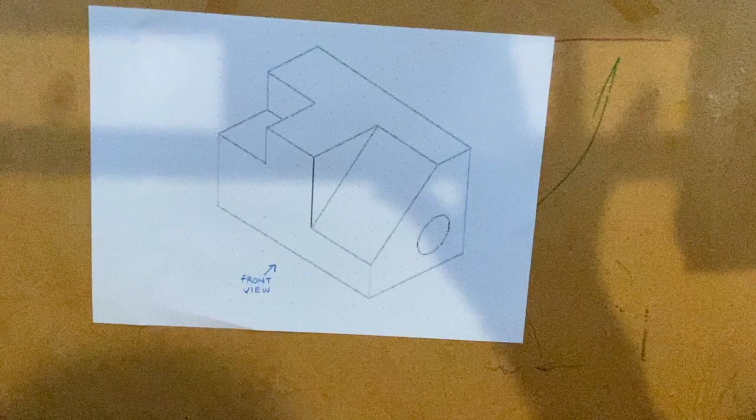In this demonstration, I'm going to show you how to draw this isometric object as an orthographic drawing. I'm going to draw it at the scale of 1 to 2, so it will be half the size of the object that's been printed out here.

Always start an orthographic drawing with a line across the base of the page. It leaves enough room for dimensioning. And a vertical line to make an L shape on the page.

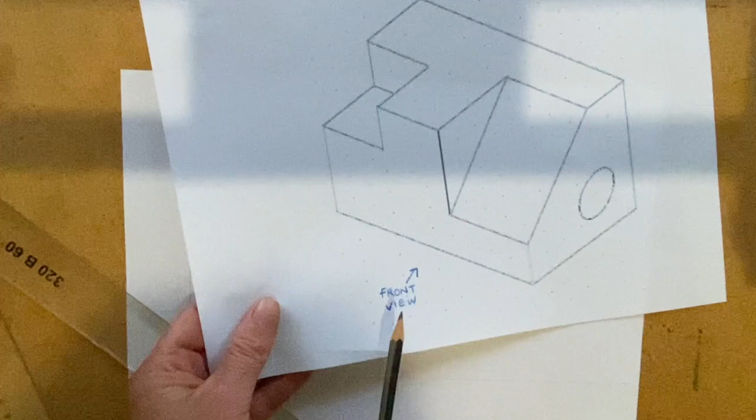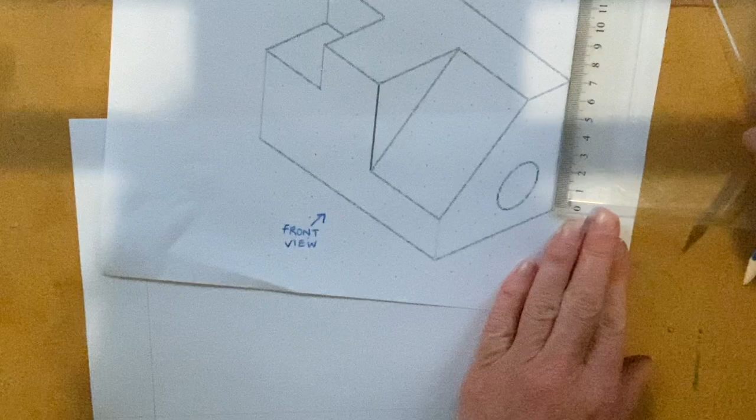Now, I've been given the front view, so in an exam situation, just double check that you haven't been given a front view already. And I'm going to draw this as a crate to start with. So that's 120 mil, so I'm going to go 60 mil across. And it is 70 mil high, so 35 mil high, so 60 by 35 at half scale. Using the edge of the page.

Okay, I'm going to start by drawing in these different areas. 35, so half of 35, that's testing my maths. 17.5 mil, going down 20 mil, we go down 10, that direction. I'm just going to make it 30 mil. And it's another 30 across there.

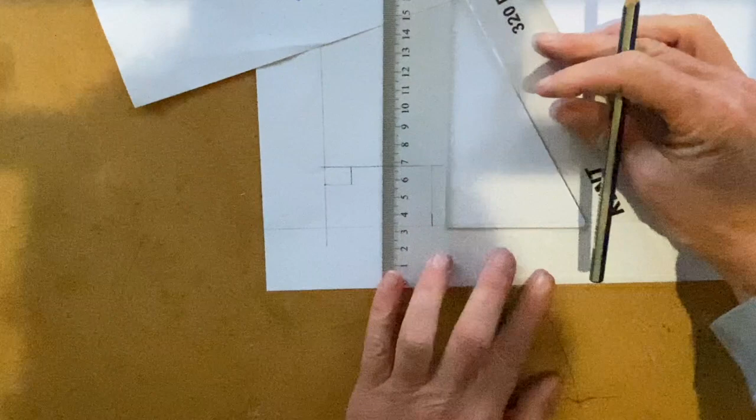I'm going to draw in as 15. We're going down 50 mil, so 25. And we finish it across the bottom there.

Okay, now this is angled, so when I look straight at that, it just appears as a flat rectangle, which is what I've indicated there. I do need to go back once I've drawn this view, and I need to put the hidden detail of this. If this is a hollow cylinder, I need to put that in there, indicate that there. But that is my front view.

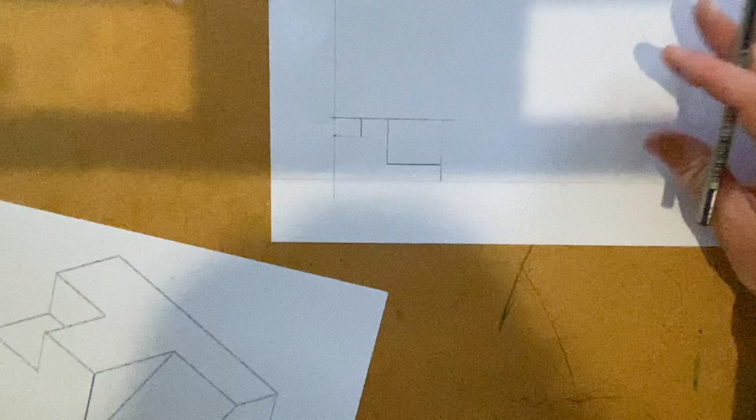What I can do from this point, actually, this is a really good technique to use. It's the 45-degree line technique. So use your 45-degree set square, and from the top right hand corner of your object, draw in a 45-degree line. And that way, once we do our front view, our right hand view, I can rule the lines up and across, and they will give me my details.

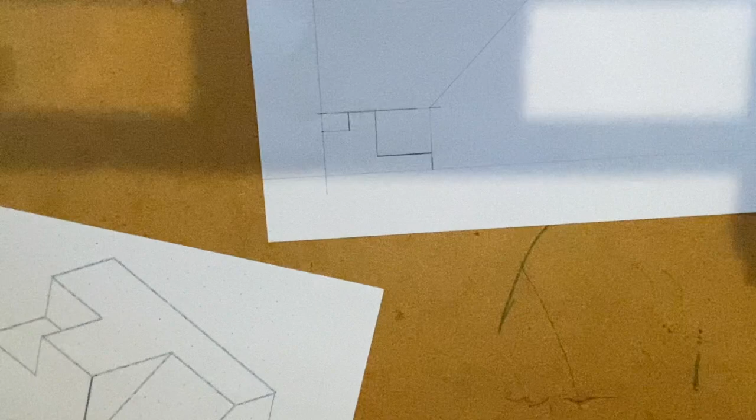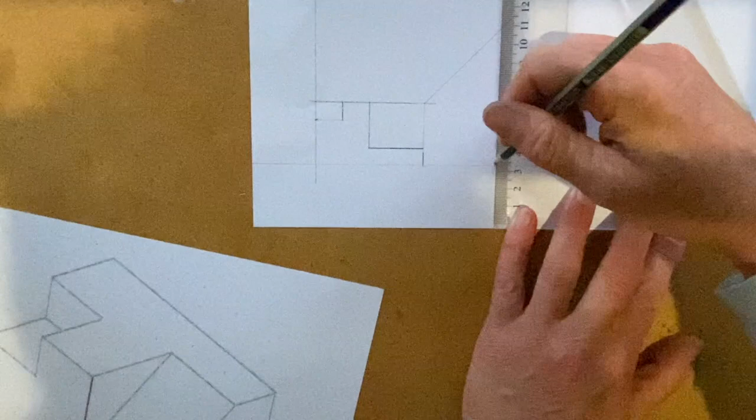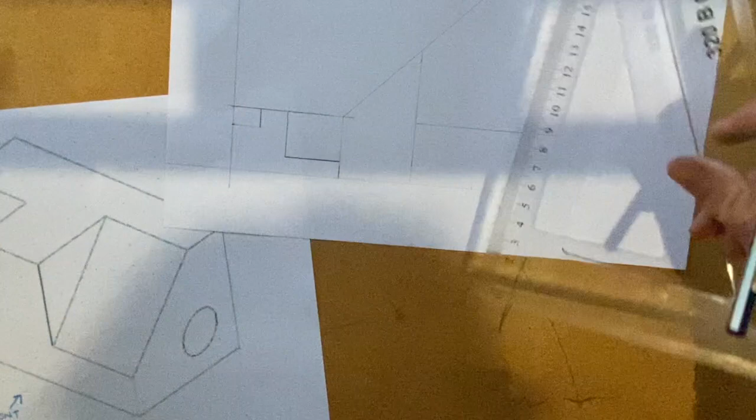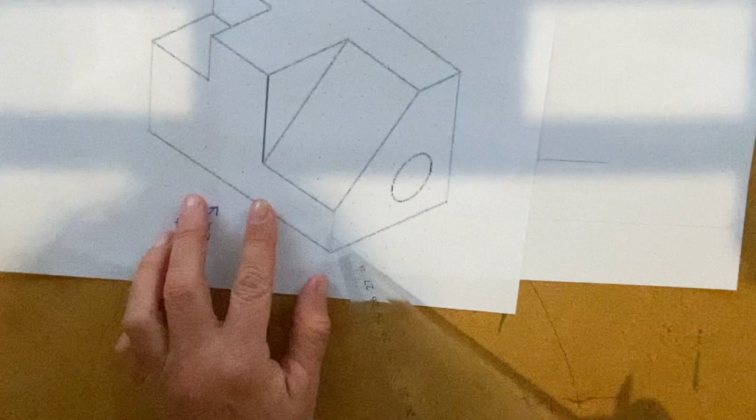Now I'm going to put 40 mil between views because I have enough space on this page. You can either use 20 mil or 40 mil, but whatever you do here must be done there. I already know the height, so I can just run that line straight across. It's 70, so I'm going to go 35. I'm actually just going to run that line straight up there already. Now, this angled line here, I know that that is 20 mil and that is 20 mil, so it's going to go up 1 centimeter and 1 centimeter.

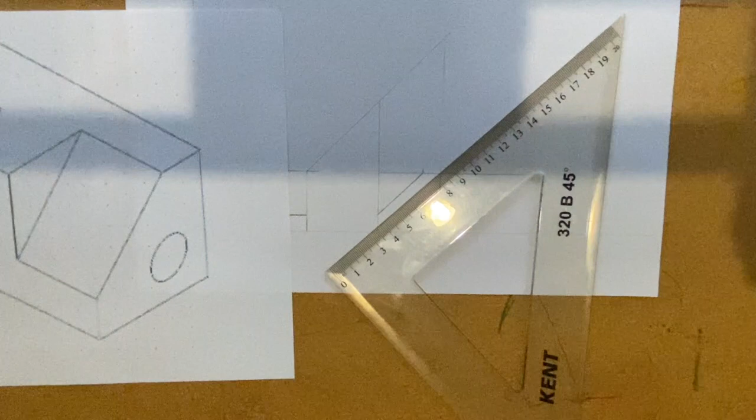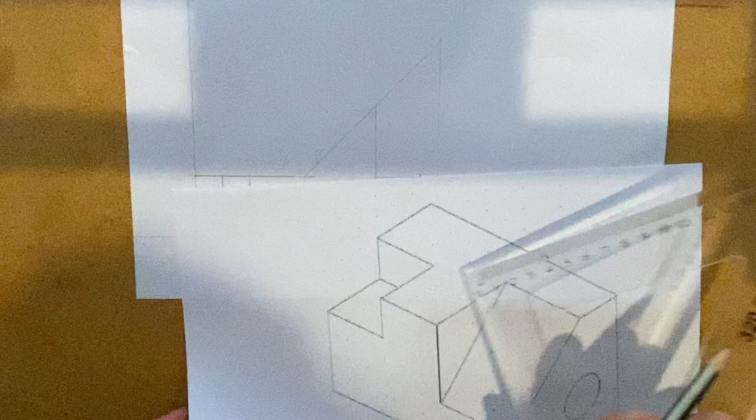Now I will have to show the hidden detail of this, which is pretty easy to do because I've got that information there. I know it goes from the top, from the right hand view, it goes back 30 mil that way, so 15 mil. And I'm going to change that to a dotted line because it is hidden detail. Okay.

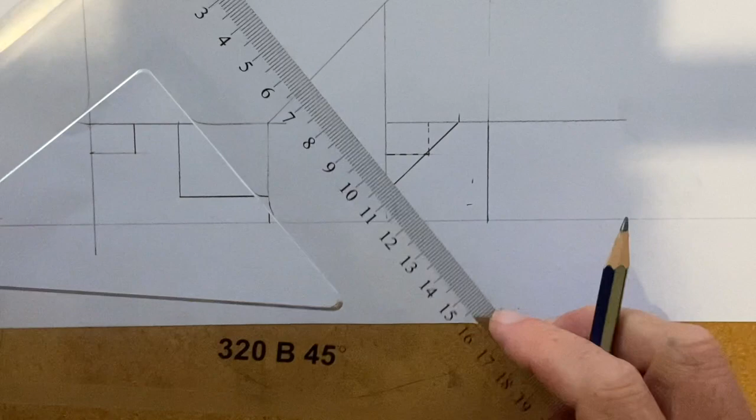So now I do need to put in, zoom in for you so you can see that. This circle, it's 1 centimeter up, 1 centimeter across. It's 20 mil in diameter, so I'm going to go half, and make it a 10 mil circle. So 5 mil here, 5 mil here. I'm going to draw this in as a box to start with. Then I'm going to find my circle template. 10 mil high. My circle template. I have my 1 centimeter circle.

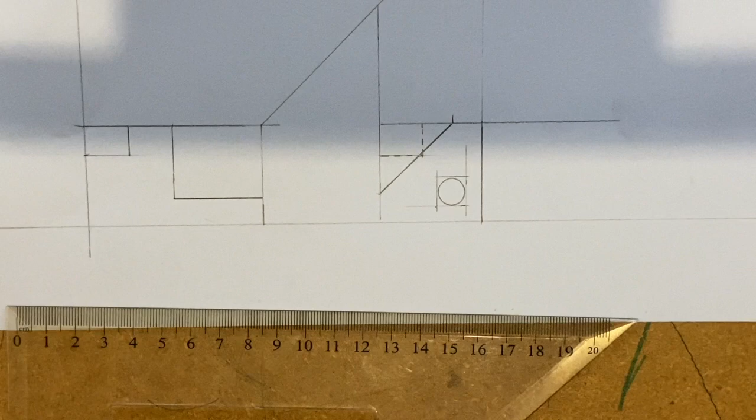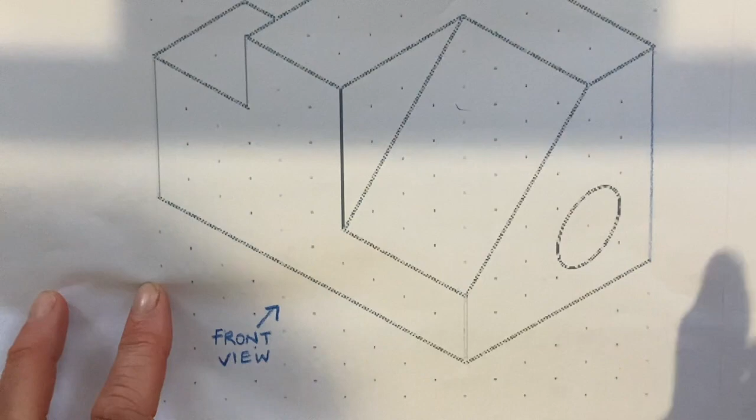And I'm going to draw straight lines across the page from the top and the bottom of that circle. I'm actually going to put them in all the way through the front view because I'm not quite sure, but I think this is a hollow cylinder that goes all the way through. So I'm going to indicate it as one anyway.

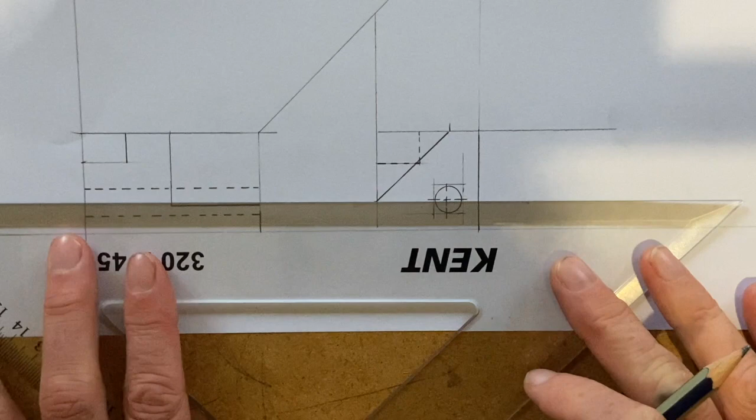With my little circle, we indicate that it's a cylinder with a long line, short line, long line, and then a long line, short line, long line. Should be a little X in the middle. And over here, the long line, short line, long line, and just extrudes out a little bit on either side.

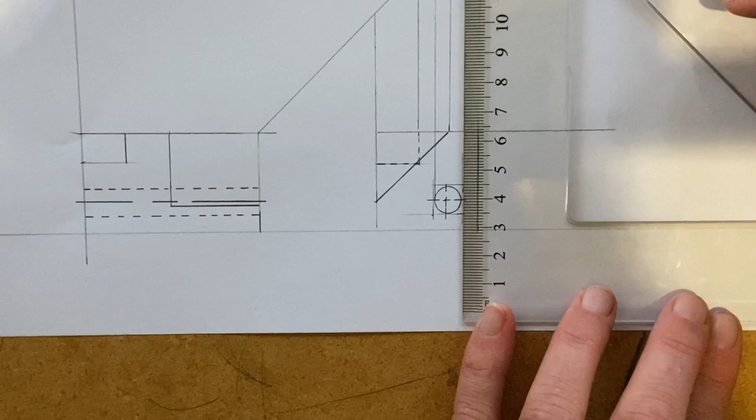Okay, so I can then rule up from all the main points up to my 45-degree line. That gives me most of the information that I need to do the top view, and I'll show you how we work that in a sec. And then what I can do, lining up my set square,

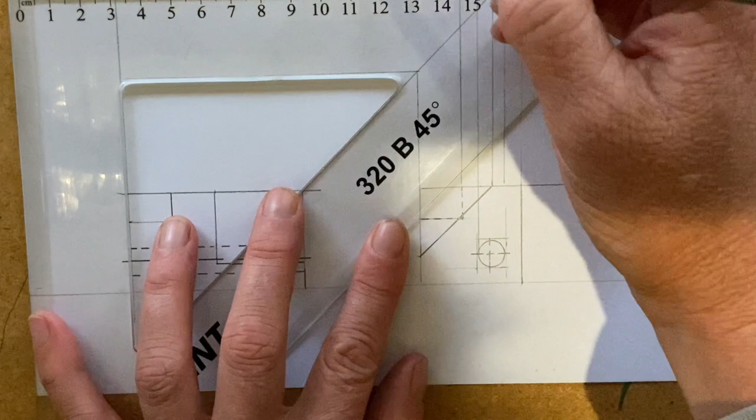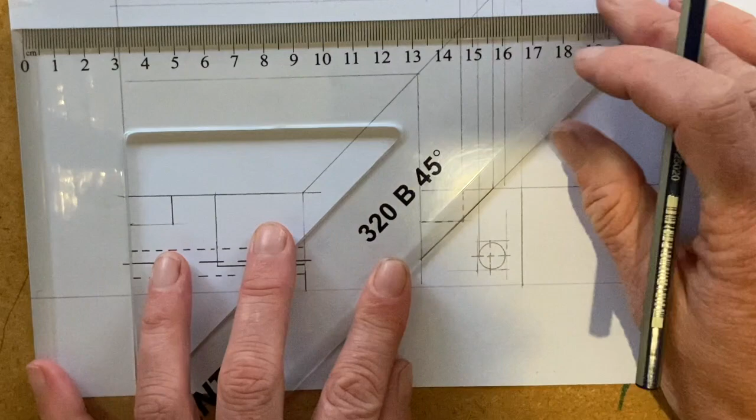you don't have to do it this way. It's just one way that orthogonal drawings are done. As long as you're really careful, you can just draw in your top view. Just make sure that everything is exactly as it should be. Then I can do my lines going up this way.

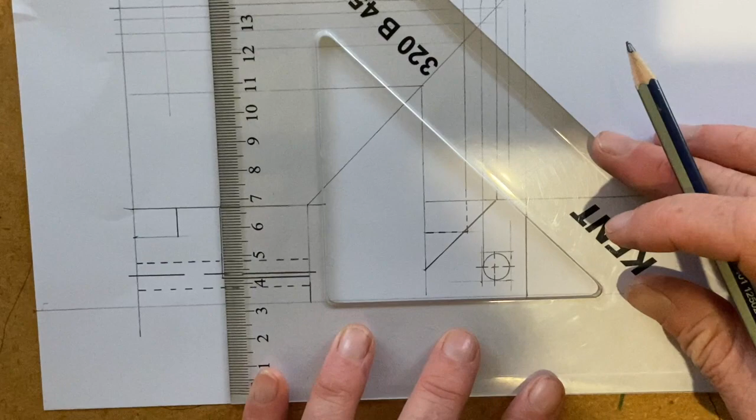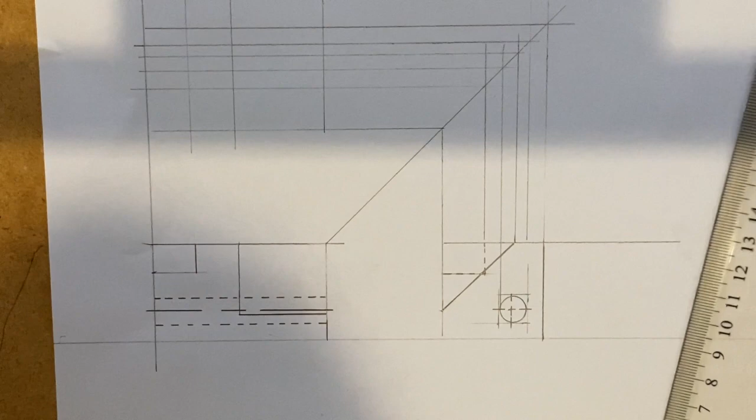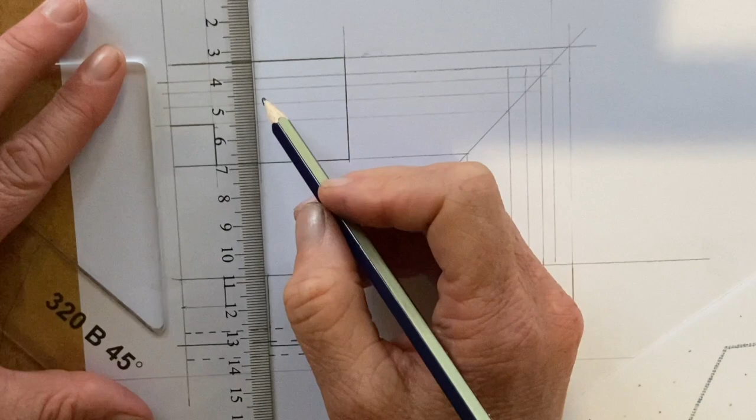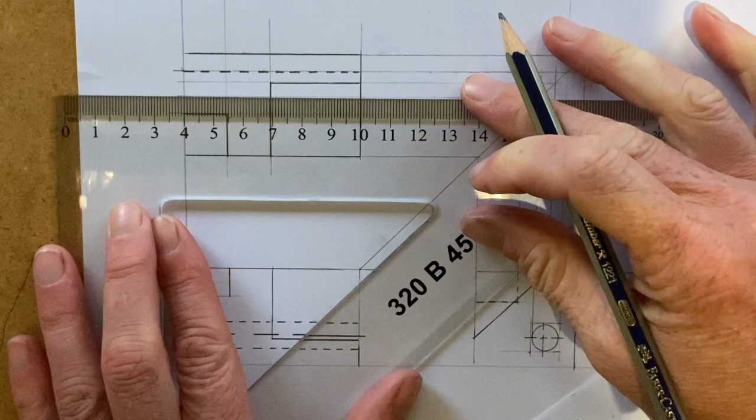If I have a look at this, I've got to imagine I'm looking down on it and I'll be able to see this shape, which, I might just darken up the edge lines first. Again, that hollow cylinder is indicated with dashed lines from the top as well. Long line, short line, long line.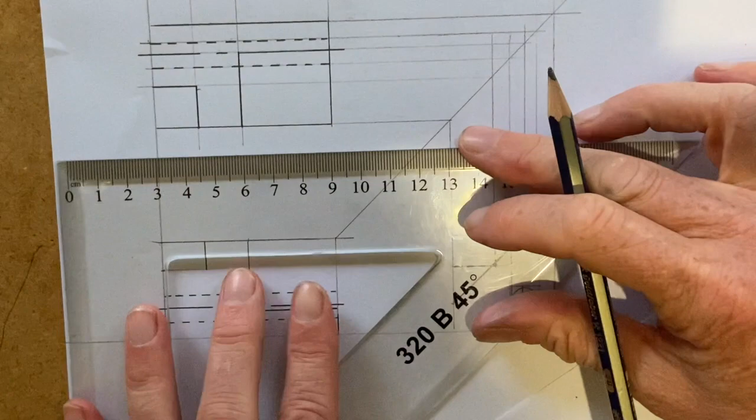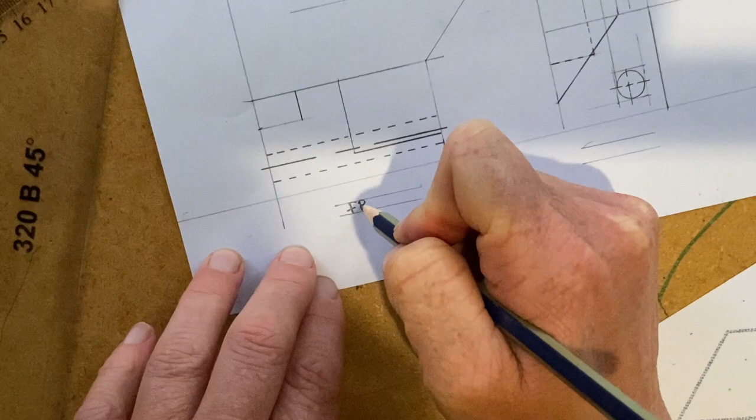Okay, so that's my 3 views. And to label my views, I just need capital letters. Always remember to put in a third angle projection symbol. So with your third angle projection symbol, it's one circle inside of another.

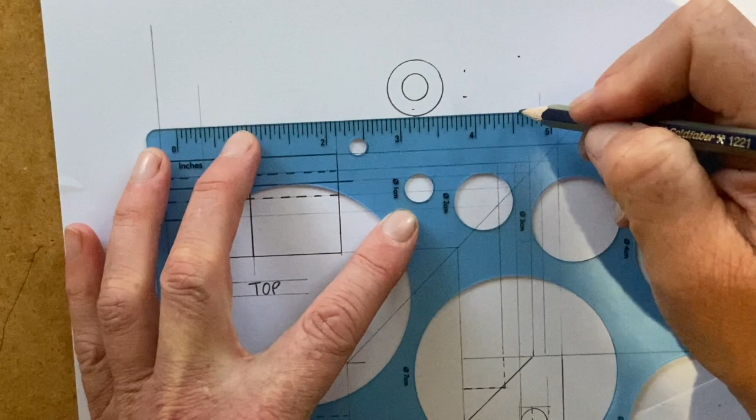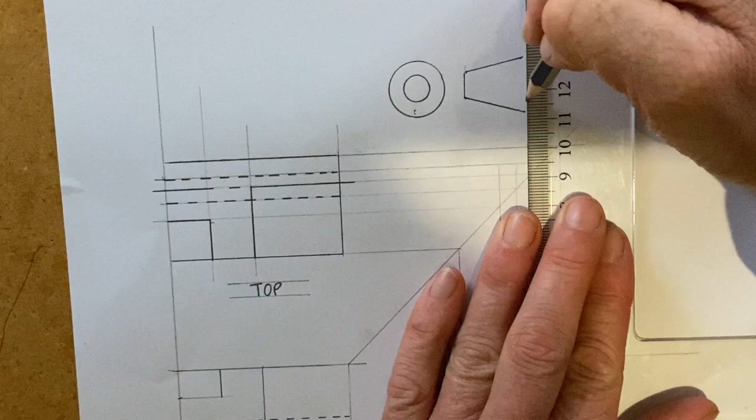And then one thing that you should note is that the chopped off triangle, it's not just a random height. The size of the middle circle is the height here, and the size of the bigger circle is that height. We draw in our target symbol with a long line, short line, long line all the way into the center of the chopped off triangle, short line, long line out.

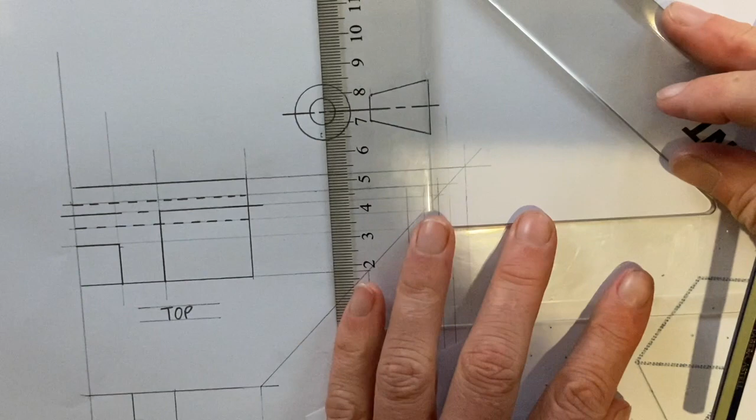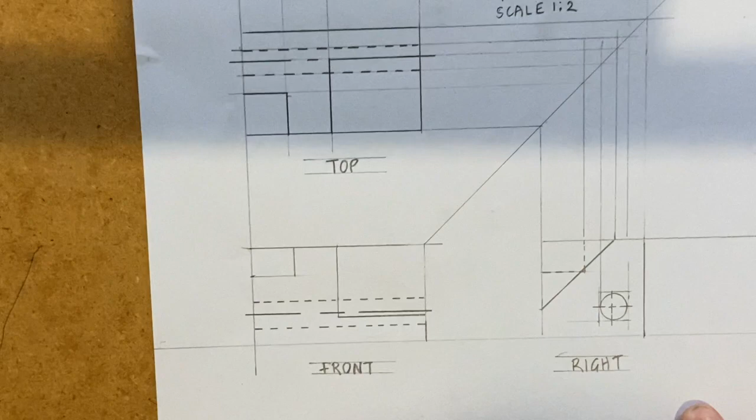And the same as what we indicated with our cylinder on our right hand view, it's a target symbol just like that. So that's a third angle projection symbol. I would also put in the words scale 1 to 2. And if you're adding measurements in, you can do that as well. And that's how to draw an orthographic drawing of an isometric view.